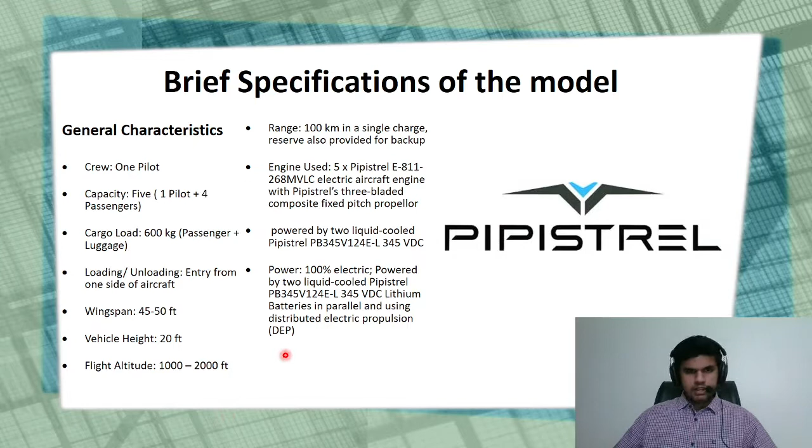So I've used 5 Pipistrel E811 electric aircraft engines, and it would be 3-bladed to four-bladed because this engine can accommodate a wide variety of propellers. I'll be talking about this engine in a few moments. So this is actually a liquid-cooled engine, and the power is 100% electric because it's an electric vehicle. So there's no emission, there's no sound, and that gives a hassle-free ride for all the passengers. So they are actually using distributed electric propulsion systems, so DEPs.

Moving on, I'll be talking about the engine and the configurations that I've used. So the question would be why I chose Pipistrel E811 electric aircraft engine. So the first reason is that it's certified for use by European Union Aviation Safety Agency, which is EASA. This engine can output maximum power of 66 brake horsepower. It won't sound much, but it's actually really helpful to keep the plane afloat in the sky. So it's actually a liquid-cooled engine. So it's 50% water and 50% glycol, which is automotive grade G12 plus.

So this engine does not consist of any moving parts, so it's really quiet, unlike the mechanical engines, which have got loads of moving parts. So this is really efficient, and the maintenance is actually really low. So the engine consists of propulsion motors, which are state-of-the-art axial synchronous permanent magnet electric motors. So that's a feature of it, and I'll be talking about the features of this engine. So it's lighter, it's really compact, it's really powerful. There's no lag in it, and like I've said before, it supports a wide range of propellers.

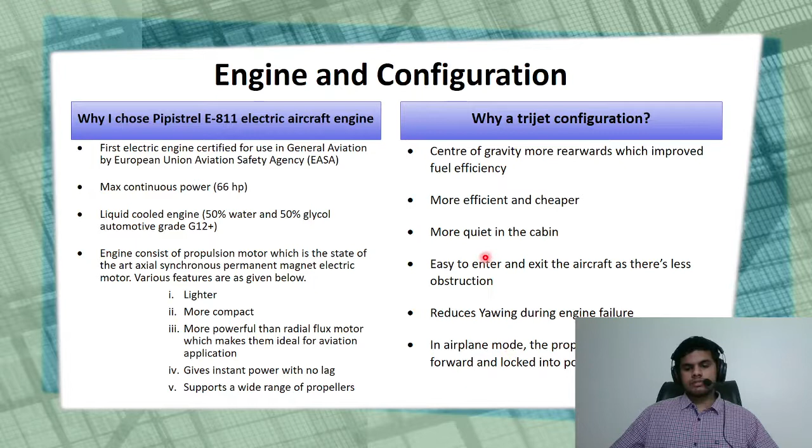And in case there's an engine failure, it reduces the yawing of the aircraft and actually helps stabilize the aircraft in such a way that they can land really safely. In the aeroplane mode, so let me go to the design.

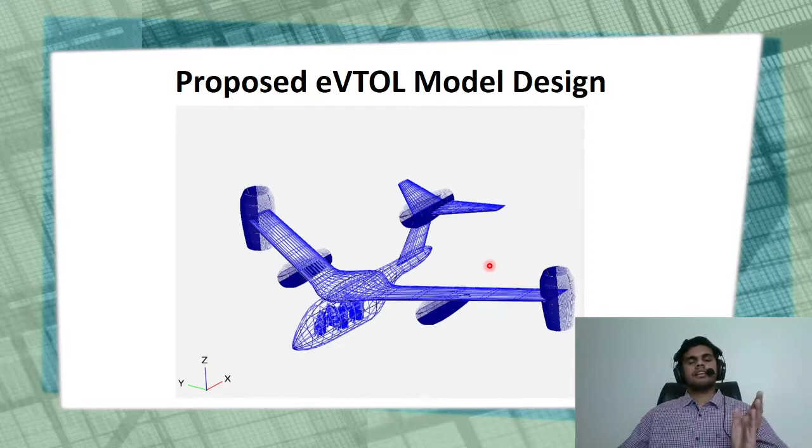So these two engines are prop rotors, so they can adjust themselves according to the mode they're flying in. In the helicopter mode, they would look like this. They would be at a 90-degree position, 72 to 90 degrees. And during the aeroplane mode, they would go horizontal to 0 degrees. And whenever they want to land again, they would slowly adjust the prop rotors to a 90-degree angle and then land safely. So that's what I've discussed over here.

So a main part of the electric vehicle is the battery. Battery is like the lifeline of any electric vehicle, be it a car, a plane, or anything. So for an electric vertical takeoff and landing aircraft to be a really successful competitor in today's world, they need a really healthy and efficient battery. So I've researched three battery company giants that claim to have done a lot of innovation in the field of batteries.

So the first one would be ChargePoint. ChargePoint is a company that has charging stations, and they claim they can charge present-day and future-generation vehicles from 0 to 25% in just 5 minutes and 25 to 90% in 15 minutes. So that's really fast charging. They have a liquid cooling technology that supports the thinnest wires, with really flexible high-capacity charging cables. Because of this feature, it is really scalable.

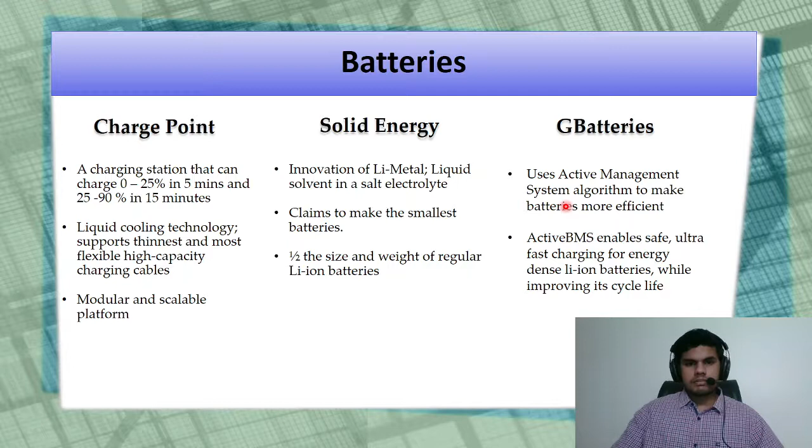So I'll talk about the user-focused design. Why do we require such a solution even if we have a lot of taxi services? The main thing is traffic congestion in cities, because even if there are many taxi services, people aren't getting from point A to point B in the time they want. People want to get from one destination to another in a really short amount of time, but they cannot do that.

And people tend to waste about 7 days in traffic jams. And there's also a rise in pollution and health ailments because of people stuck in traffic jams. They get high BP, back pain, etc. So the aim of this project, the aim that Uber wants, is to give people really comfortable travel from one destination to another in less time.

And in my design, I've actually focused on the user's comfort. So in my design, I actually located the wing at a high height so that people don't hit their head when they enter the aircraft. And the wing actually offers shade from sunlight and also rain. And the sliding door actually helps in ease of exit and entry of passengers, the crew, and also the luggage.

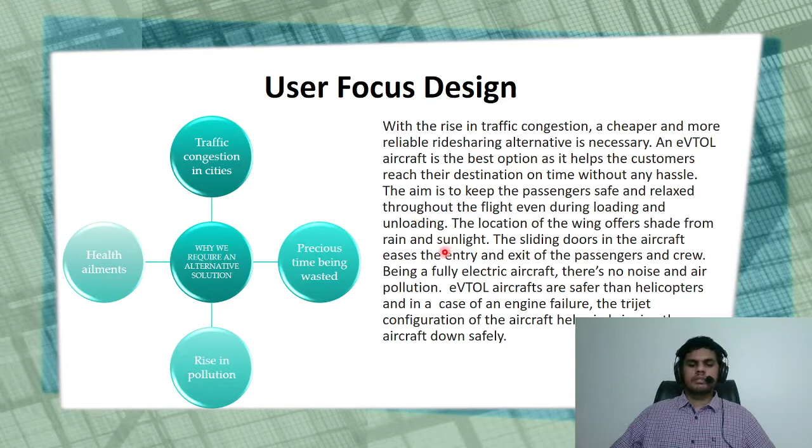So, design evaluation. Designing this was a pretty challenging task for me because I thought using Autodesk Fusion 360 or SolidWorks would actually take a little bit more time to create and analyze this design. So I ended up using OpenVSP software, and I've designed it. My design consisted of five electric engines, arranged in a tri-jet configuration. So, like I've already discussed before, it helps in the fuel efficiency and also keeps the cabin quiet.

So the prop rotors on either side of the wing will actually help it for the vertical lift, and it will automatically adjust its angles according to the flight type that the pilot chooses, which is the helicopter mode or the aeroplane mode. Since it's a VTOL aircraft, it does not require a runway, so it only requires a small space to lift off and land. They can actually land on top of a building or a shopping complex, etc.

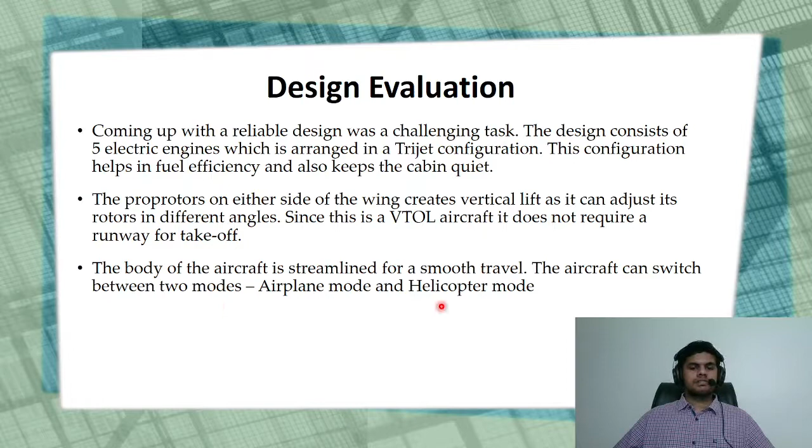So the body of the aircraft is streamlined for a smooth travel, reduces the drag, and switches between airplane and helicopter mode. So this is a sample analysis that I've done with my laptop. So that's the parasitic drag that I've calculated. The input given was 200 feet per second, which is the speed at which it would travel, and an altitude of 1,000 feet. And after calculation, I've gotten these results over here. So this was actually designed and analyzed in OpenVSP software.

I've actually run into some difficulties while doing analysis on these aircraft parts. I don't think my computer was calculating properly because it was too heavy for it to handle. But I did most of what I could. Like I've already said, the batteries are the driving force for an aircraft or any vehicle.

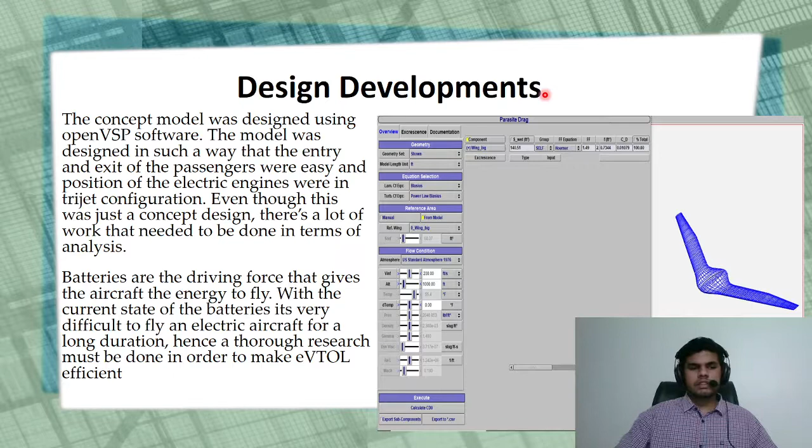In this design development, I've taken ideas of what I need to put in my aircraft, like the model of the wing itself, how it should be designed, and what type of engines I have to use, what batteries I need to use. So all that was done in design development. And design implementation.

Uber plans to implement this idea by 2023, but I think it's a bit too early to do so because there's a lot of innovation that needs to be done in terms of batteries. Batteries are the main reason for this. So they've actually demonstrated their first flight in 2020. So like I've said, a lot of work needs to be done with the batteries.

So joining forces with the three companies that I've discussed earlier would actually give them a solid advantage over other competitors that are coming, and in implementing their ideas. For example, the algorithm would actually increase the efficiency. ChargePoint would actually help them with fast charging, and Solid Energy would actually give them really small batteries. So joining their forces would help them gain a tremendous advantage, increase the efficiency and range, and also decrease the weight and size of the aircraft.

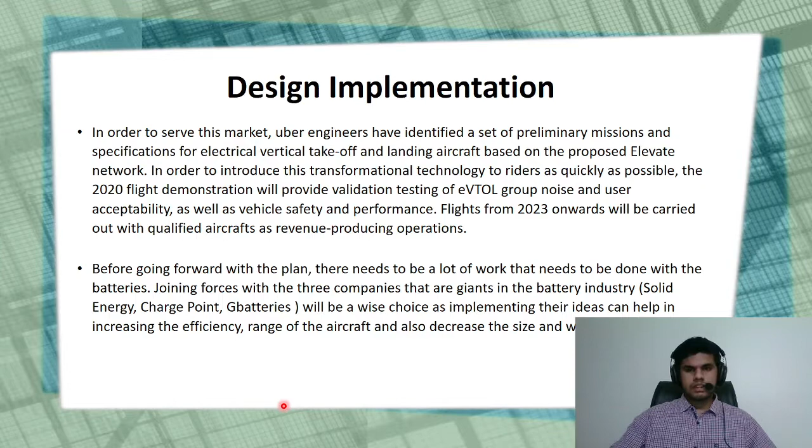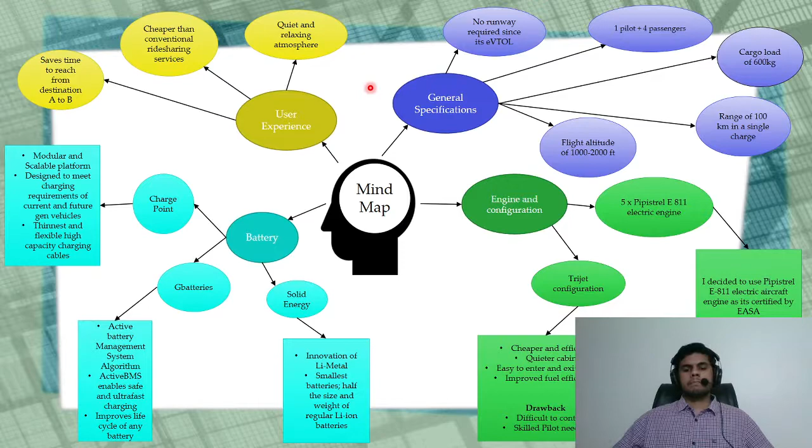So I would like to talk about the internship as a whole. My work was on designing an autonomous flying air taxi and its engine for Uber, and implementing these innovations in the future aviation and aerospace industries.

This was actually a really great opportunity for me because I got to know more about the future advancements in aviation as well as automobile industries.

The reason why I applied for this internship was because of my interest in designing and manufacturing, and I learned these topics in lectures and courses in my college and school, and I wanted to implement the topics I've learned in a real life scenario, and this internship really helped me to do that.

Even though it was a remote internship, it helped me learn new methods and techniques in designing a futuristic vehicle. I was more into using Autodesk Fusion and SolidWorks, but doing this internship, I got to learn about another software called OpenVSP. That was really enlightening and good.